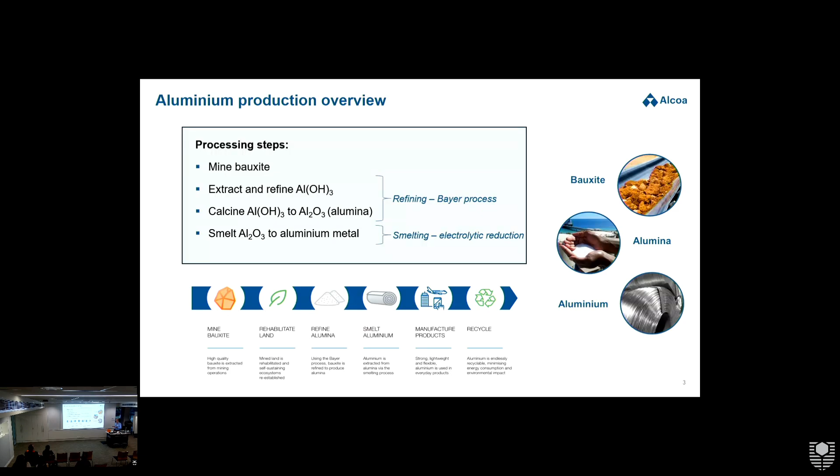So talking about what we have in operation: first of all, in terms of mines, we have mines in Western Australia and in Brazil. We have refineries particularly in Western Australia and Brazil, but also in Spain. And then the smelting stage of the process, which I mentioned is even more energy intensive than refining.

We have a smelter in Victoria, in Brazil a couple of smelters, and particularly in Northern Europe, the US, and one in Spain. This congregation is no coincidence, because there's enormous quantities of hydropower there, and that's really important to the smelting operations.

In Western Australia, we run two mines. The Huntley bauxite mine feeds Kwinana Refinery and Pinjarra Refinery. Kwinana Refinery is unfortunately currently curtailed - it stopped earlier this year. Pinjarra is very much alive and kicking. We also have a Willowdale bauxite mine a little further south, which feeds the Wagerup Alumina Refinery. Those mine sites have crushers at the mine and then conveyor belts that feed the bauxite down to the refinery, and then ports at Bunbury and Kwinana to export alumina.

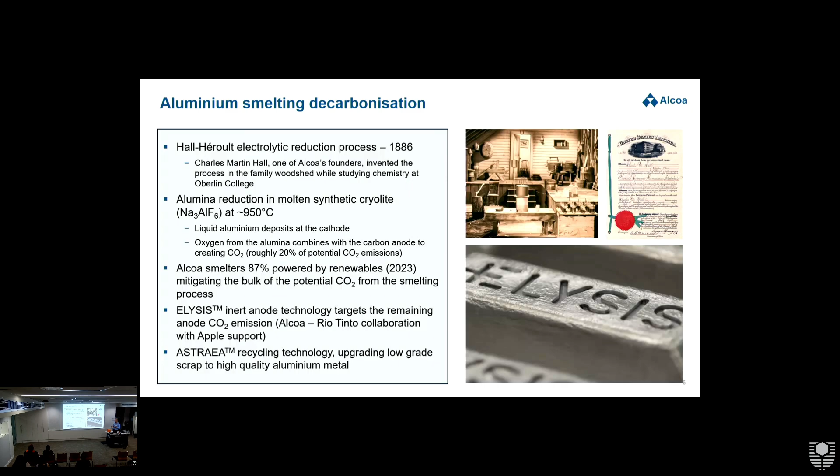Just wanted to mention, so this is not decarbonising smelting, but recycling. There's also a technology that Alcoa is developing called ASTRAEA, which people mistake for an Australian accent, staying in Australia, but anyway, I'm not sure where the name came from. That allows poor quality aluminium containing scrap to be upgraded to high quality metal. So a really important component of the aluminium journey.

On the refining side, which is the area we have running in WA, there's two refineries currently with Alcoa, Pinjarra, Wagerup, and South 32 as well. The energy used in the refining process is largely in heating - heating, cooling, evaporation of the process solution or liquor - and to a lesser degree electricity.

And the heat is largely generated through cogeneration, where an electricity power plant produces electricity, and the heat produced as a byproduct of that electricity generation is used for heating in the refinery. The refinery uses less electricity in the current model than is produced in this process - it needs more heat than it does electricity. Hence the cogeneration opportunity.

And the final step is calcination of the trihydroxide to alumina, and currently, through Alcoa, gas is used for that step. I'm going to talk very generally here - there's areas where it's quite sensitive from a commercial point of view, but it's also an area where I think the industry is starting to learn to collaborate more, because the problems are bigger than one industry. Some of them are very hard to solve.

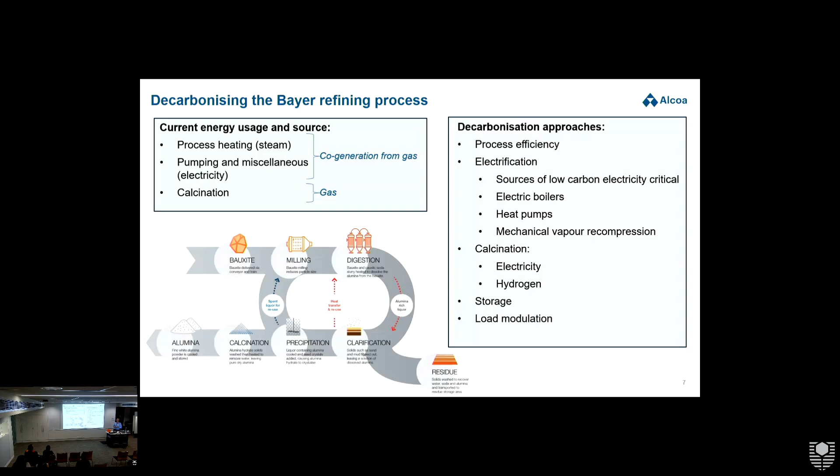And integral to all of this is storage - either heat storage or electricity storage - because renewables as we know them at the moment are only available when the sun shines and the wind blows. The other way of looking at that is load modulation. Currently we run consistently and try to keep our plants as stable as possible, but it may be that the future involves turning things down and turning things up - load modulation.

And we'll move straight on to Ryan Duncan from South 32, talking to us about decarbonisation again, and coming from the Decarbonisation Concept Studies Group.

Good evening, thanks for inviting me to speak, and Chris, thanks for your presentation - it's going to be quite complementary to what I'm going to talk about tonight. My name's Ryan Duncan, I work for South 32 and I'm a study manager there. So where I sit in the group is the front end of the capital investment process - before us comes our technical development group, and then as we progress things to a project stage, they get assigned a study manager, and it progresses through various levels of definition and might turn into a large project.

So that's where I fit in. How many of you have heard of South 32 before? Yep, everyone, that's good. How many of you know where we operate? Yep, a few. All right, so I'm just going to touch briefly on South 32 - who we are, our commodities.

Basically, we're a global mining and metals company, and we were spun out of BHP in 2015. As you can see, we have a global footprint, but a more diverse commodity base - we're operating in 9 different commodities which are critical to everyday life. We've got around 10,000 employees working for us across 10 countries, and we're extremely active in the aluminium value chain. Our EBITDA in FY24 was around US$1.8 billion, and of that, about 26% came from the aluminium value chain. So, similar to Alcoa, we operate both alumina and aluminium smelters.

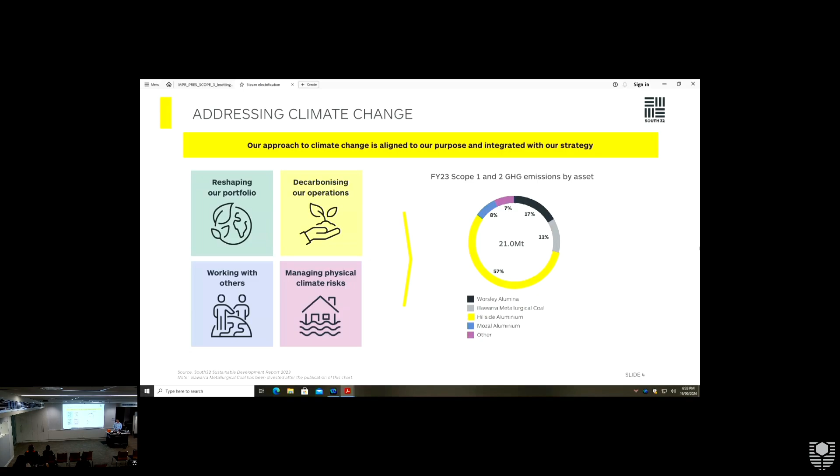So alumina, it's a hard to abate industry, and I think Chris touched on that, and I'm going to come back to it in a second. But in terms of the asset itself, it's a long life asset, and it's got significant regional economic impact. We employ around about 2,400 employees and contractors, and domestically, we're spending over $1 billion in the local economy.

In 2021, our baseline emissions were 3.75 million tonnes, and we have decreased from that in recent years. Just to give you a feel for the size and scale of that, as a single facility, that's around about 0.8% of Australia's greenhouse gas emissions in 2021, so quite large.

So you can see a little bit of a layout here. So our mines, we mine near Boddington, and it's conveyed down to the refinery, and similar to Alcoa, we rail our finished product to the Bunbury port and export out of the port there.

So why is it so hard to abate? The purpose of this is to really just give you a feel for the energy intensive nature of it. Chris touched on this - the energy consumption by Australian alumina refineries, and this is the 6 of them in 2020, is approximately 221 petajoules. So if you compare alumina refinery to, say, Tasmania on the top there, as an industry, we're using double the energy that state is using. So really, really energy intensive.

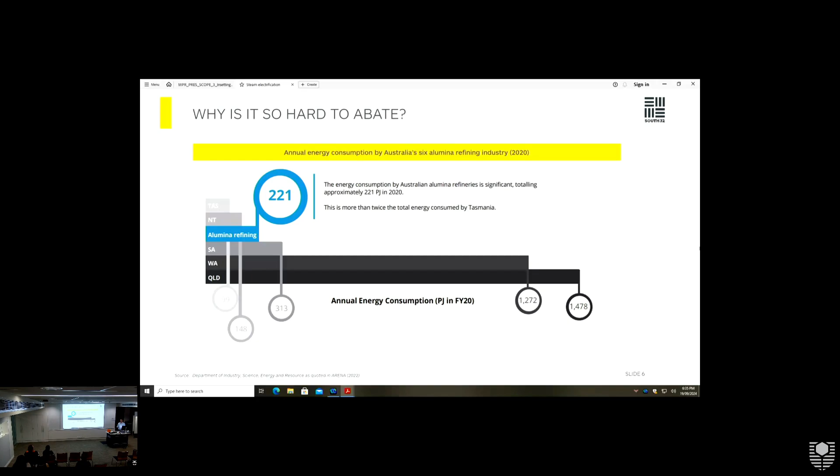Chris spoke a little bit about this - where are the emissions generated in the Bayer process? We use coal and gas, and they co-generate electricity as part of the process, but the majority of that energy is converted into steam, which is used to heat the caustic and dissolve the alumina. So mining is a small component of the overall greenhouse gas emissions, around about 3%. The majority of it's in the Bayer process, 75%, and then calcination's the remaining 20%.

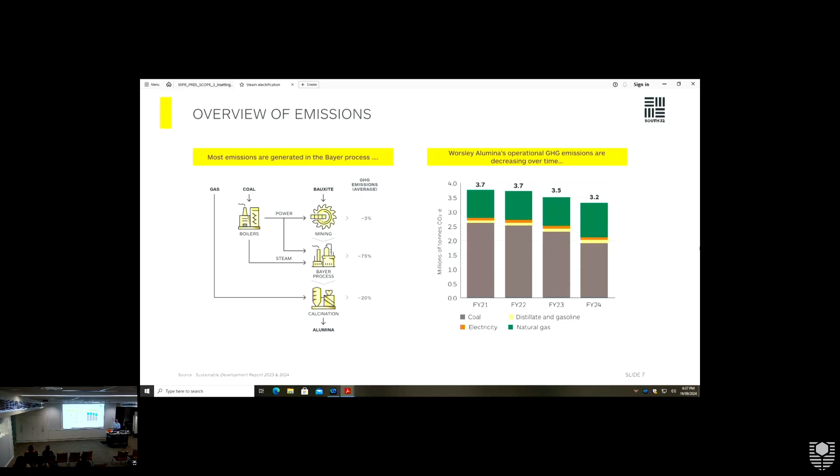Calcination's also similar to Alcoa, done through a gas method. A little bit of a difference to Alcoa, we are partially converted coal to gas, and we're going through a bit of a fuel transition now, which we'll talk about in a second. So you can see on the right, our emissions have been reducing over time, and one of the key things driving that is the changed fuel mix. Our coal as a source of emissions in FY21 has now decreased because we're using less of it and we're using more gas. Gas is less emissions intense than coal, so that's where some of the near-term savings are coming.

In terms of a decarbonisation pathway and where we're heading, in the short term, we're focused on coal to gas conversions at Worsley Alumina - moving from the more intense to the less intense fuel - and also reducing steam demand. So a very similar approach to Alcoa, where we're looking at energy efficiency, making the refinery as efficient as you can, and using the lowest emission source fuel.

In the medium term, we are looking at electrification, and Chris touched on some of those technologies - things like electric boilers, mechanical vapour recompression and heat pumps. There has been some industry trials done on some of those technologies, and to give you a feel for why electrification is quite challenging, if we were to go and electrify our Bayer process steam requirements using just an e-boiler, it would use about 80% of the electricity that Peter Dutton's proposed nuclear power plant would generate, and that's for one alumina refinery. So significant energy use.

Because of that, it's less preferred to go and get a high technology readiness application such as an e-boiler, and that's why we're focused on things like mechanical vapour recompression, using renewable power to upgrade the low grade steam and energy into a higher grade process energy. This is going to take a few years, because mechanical vapour recompression is used in other industries but not yet applied widely in alumina, and there are some challenges in developing that. So studies are underway as to how we do that, and a co-commitment to making that work is some of the things Chris was talking about.

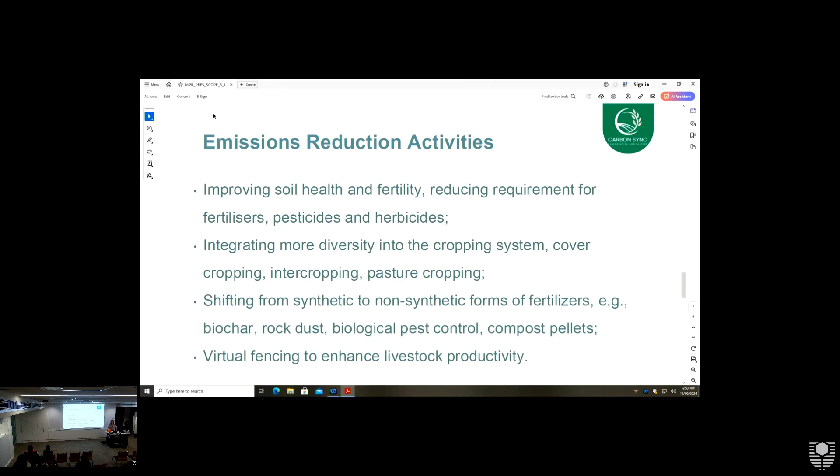What relationship does this have to Carbon Sync? You can't store carbon in soil by managing agricultural land from an industrial paradigm. You need to shift to more of an eco-agricultural approach to agricultural management, which are many of the practices mentioned on the previous slide. So by default, when farmers work with us, they not only remove carbon dioxide from the atmosphere, they also reduce their emissions.

And that's the end. Thank you.

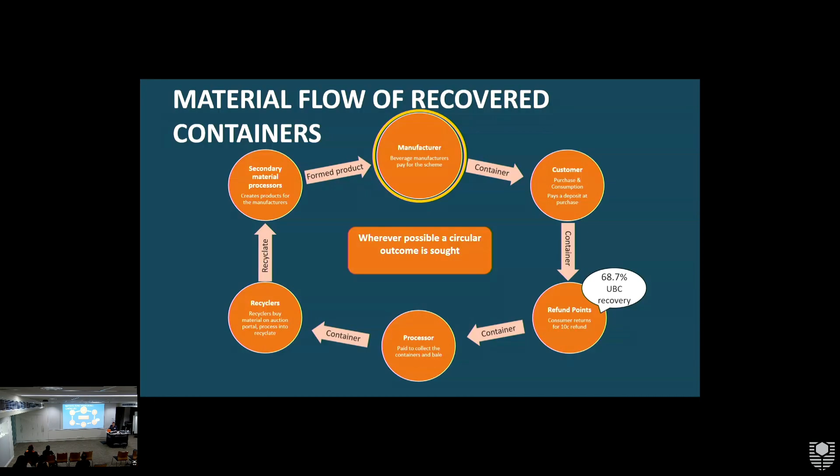In terms of can recycling, and this is where you'll see the difference, we generate 92 kilotons through can recycling, can consumption in Australia. Of that, only 74% is recovered. Now you can see 25% is actually still sent to landfill.

In WA, we have two waste-to-energy plants about to fire up. One already has fired up, and the other one is in the process of firing up. We are currently looking at, in that process, is there a way to further extract those resources in the char that they produce at the other end, to be able to then try and reduce that 25% going into landfill. So that's an investigation I'm undertaking at the moment with the two operators of the waste-to-energy plants.

Out of that 74% that's sent offshore, only 48% is back to can. This is a direct result of either the traders who are selling into markets that don't produce cans, or it's heavily contaminated and the product can't be used in can remanufacture. And that's a really critical part when you're talking about material recovery facilities and what happens in your curbside bin. So that's 74% recovery rate.

When you're talking about the total recovery rate of aluminium cans, through the container deposit schemes it's an average of 65%. So that other 9% is recovered through your yellow curbside bin. I do get asked this a lot: do we actually recycle the material that goes into your yellow curbside bin?

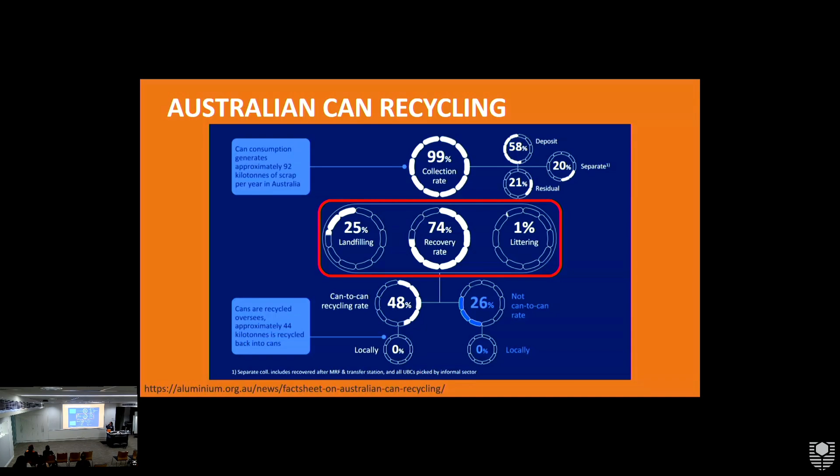Where there's a discrepancy is if they pick up a load that's heavily contaminated, it won't even make it to the material recovery facility. It will literally just get diverted straight to landfill. So really important tip today, don't put stuff that you shouldn't in your yellow bin. The other 26% gets diverted into other products and it will be mixed with other items.

So what does that look like for Australia in the future? Aluminium recycling in Australia is being investigated, but what is driving the desire and a lot of the business cases is the ESG targets - that's your environmental, social and governance targets. Most companies will fall into one of the tiers, tier 1, 2 or 3, where they will actually have to report on their ESG targets and their ESG compliance and usage within their business.

That is driving innovation in energy, and we've already heard from the alumina producers and processors that energy is a very big lever and also a big barrier to having low carbon aluminium being produced.

So that is actually driving a lot of innovation and also circularity targets. The forecast globally at the moment is there's going to be a 40% growth in global demand. I'm just talking about UBC here, not the wider aluminium market - just UBC, aluminium for beverage cans and packaging.

We're seeing that growth mostly as people transition from heavier items like glass and plastic. We've seen quite a shift in plastic consumption that has been dropping, and aluminium is really picking up, replacing glass in a lot of places for obvious reasons. That growth means UBC currently only represents 10% of the total aluminium that's put into the market and available for recycling in Australia.

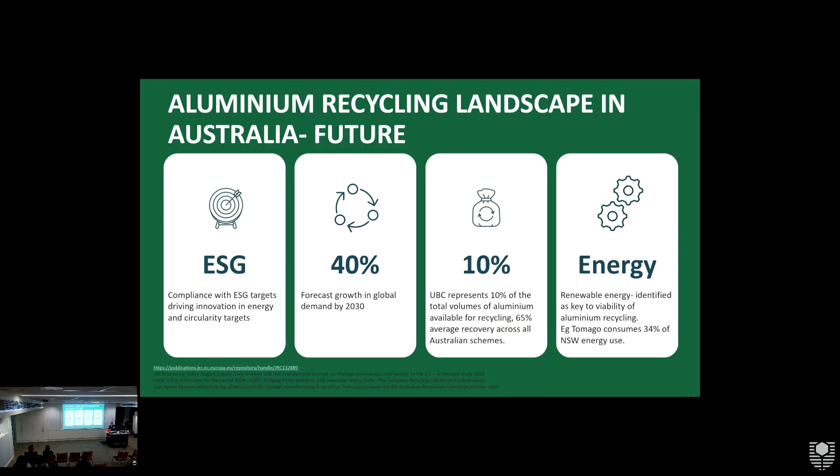This again comes back to renewable energy. There's a lot of work being done in how to create sustainable renewable energy for heavy resource dependent manufacturing, and recycling is definitely one of them. There are circularity precincts being set up, one of them in Parkes in New South Wales, where they're co-locating renewable energy sources alongside manufacturing and other industries - similar to what's happening in Kwinana Hub, but developed a next level along. This is being seen as one of the biggest areas where we need to drive innovation. Just for example, the Tomago plant uses 34% of New South Wales' power, so it's a really key part of any future recycling.

So just to wrap up the benefits: even though we only represent 10% of the total aluminium market, we're consumer driven, and that consumer behaviour can be transferred into a wider industry. If we can have behaviour change around people thinking about aluminium or any packaging as a resource that can be recovered and recycled, as opposed to just waste, that can transfer into the building industry and other industries where the same thinking applies, bringing that behaviour change into recovering more aluminium - because as we've heard from the guys producing aluminium, it takes a lot less energy to recycle it than to create it in the first place.

So the extended producer responsibility provides a highly regulated framework. You've got a lot of accountability and transparency in it, but you also have social and community benefits, driven by that incentive to fundraise and get their money back. In WA especially, we have 48% of our refund point operators as social enterprises, which has been a fundamental shift in how a lot of those entities can operate their business and deliver services across a wide range within their local communities.

There's a trial going on at the moment between Capral Aluminium and the Tomago smelter in New South Wales, looking at how they can remelt 500 tonnes of post-industrial scrap from the Capral manufacturing plant. What they're investigating is whether there's an opportunity to create smaller format remelters, as opposed to the large-scale traditional industries set up 30, 40, 50 years ago with the automotive industry, where we had a really good offtake using aluminium that we no longer have in Australia.